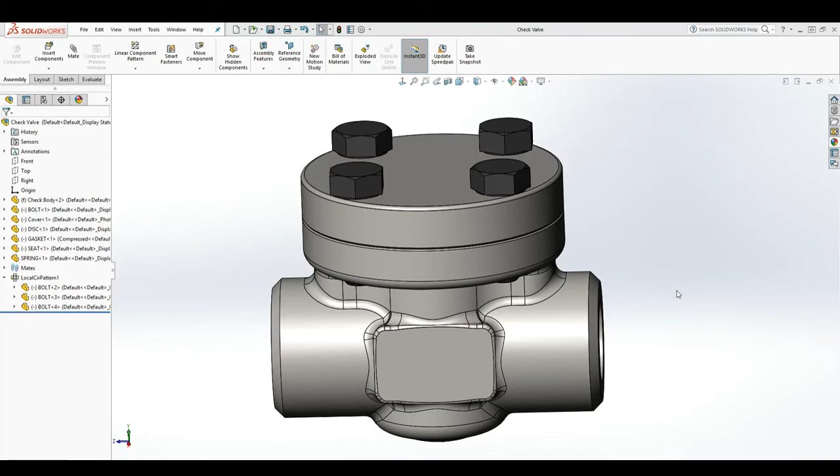In this lesson we are going to learn how to change the scene in our assembly. So we have our assembly here.

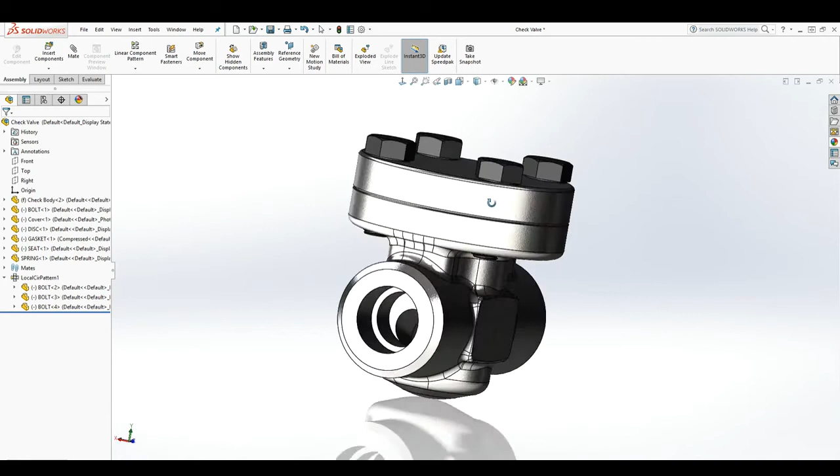A couple of things we can do to actually get this model looking good is right under this view setting, we can turn on RealView graphics. So when you have a good graphics card in your computer, you actually see a more fine definition of that appearance. Now as you can see, we can see that carbon material very well.

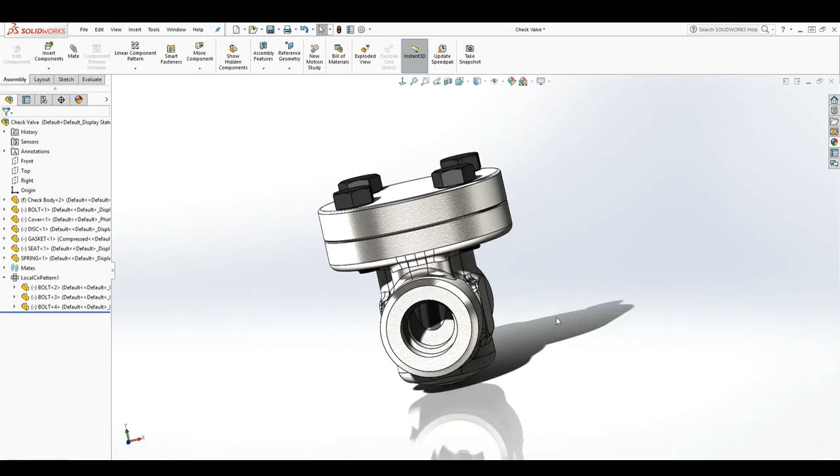It looks pretty good. Another thing we can add is shadow, and now there is shadow in the assembly. And another thing we can do is add ambient occlusion, which just gives further fine definition. The last thing we can add is perspective.

Perspective is just how you look at it. So if I put it at that view, as you can see, everything looks really good.

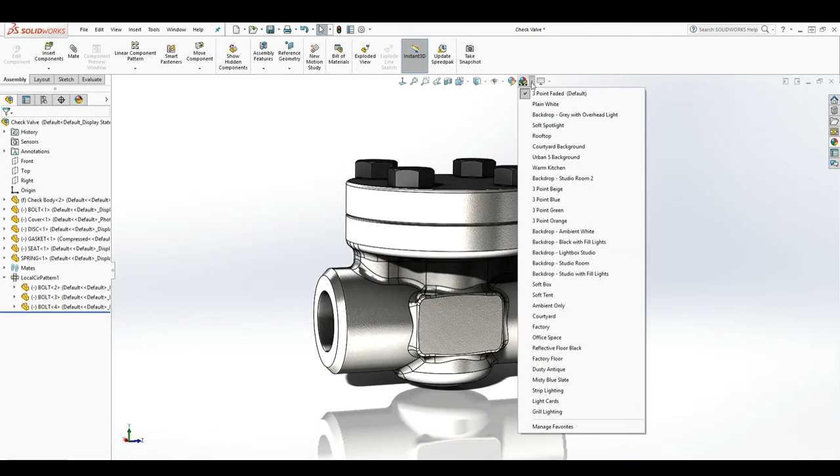To change the scene in our assembly is pretty simple. You click on this drop down, and you have all the different scenes, see, I've added all these scenes to it, but you can manage the scenes by clicking on manage favorite, and this dialog box comes up.

You see I have all these checked, but if you uncheck it, you can only select the ones you want on your main screen, by unchecking this.

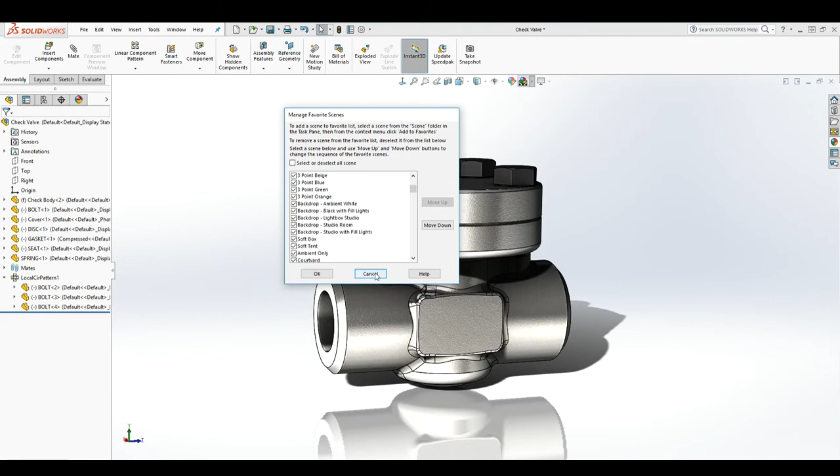So what you just do to change your scene is click on the drop down, and you can start changing it. Click on the drop down, and any scene I change it to, as you can see, the scene is changing. You can pretty much select any one you want.

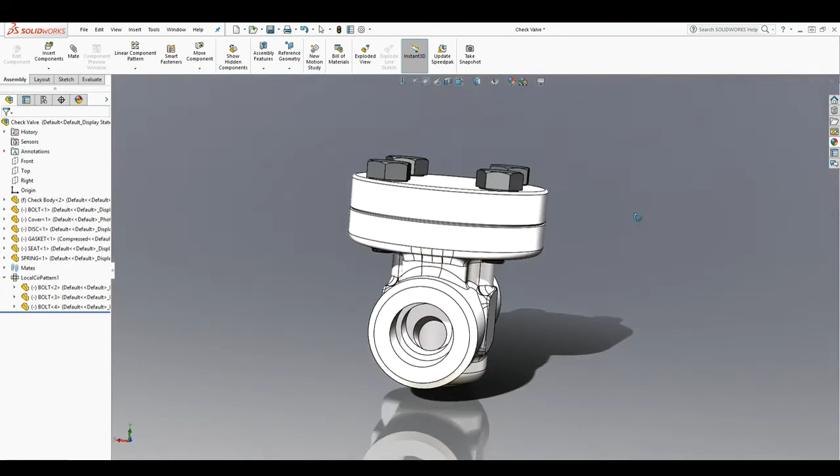Based on what you select, your screen is going to change. So that is pretty much how you change your scene in SolidWorks.